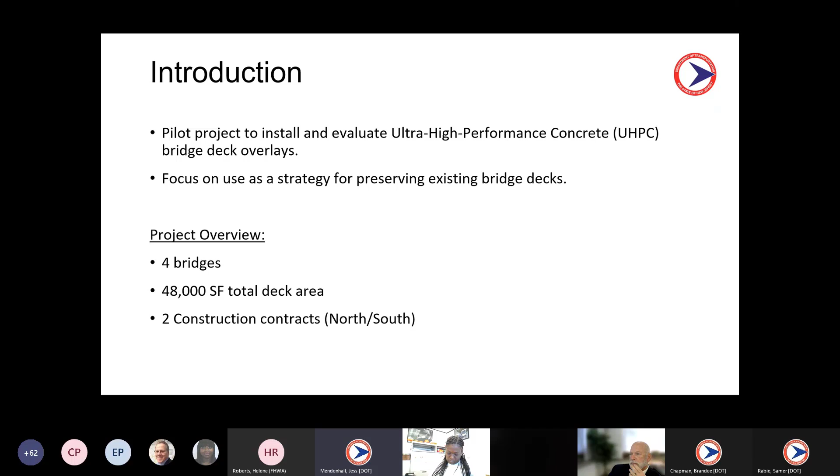Many of you are probably already familiar with UHPC, but if you're not, I'm going to quickly go over some of the material details. UHPC is a cementitious composite material. It's typically composed of Portland cement, supplementary cementitious materials, fine aggregates, water, high-strength steel fibers, and a series of chemical admixtures, a common one being a superplasticizer. Unlike conventional concrete, there's no coarse aggregate, and you can see the image in the upper right showing the mass or weight distribution of the typical components comparing conventional concrete and ultra high performance concrete. There's an optimized dry material size gradation, and this allows for particle packing, giving it a lot of the superior durability properties.

UHPC has mechanical and durability properties that greatly exceed that of conventional concrete. Some of these properties are the compressive strength. There's an increased tensile strength, and there's also a behavior that you don't see in conventional concrete: a post-cracking tensile strength, which comes from the steel fibers distributed in the mix. The durability properties are superior to that of conventional concrete, such as reduced permeability.

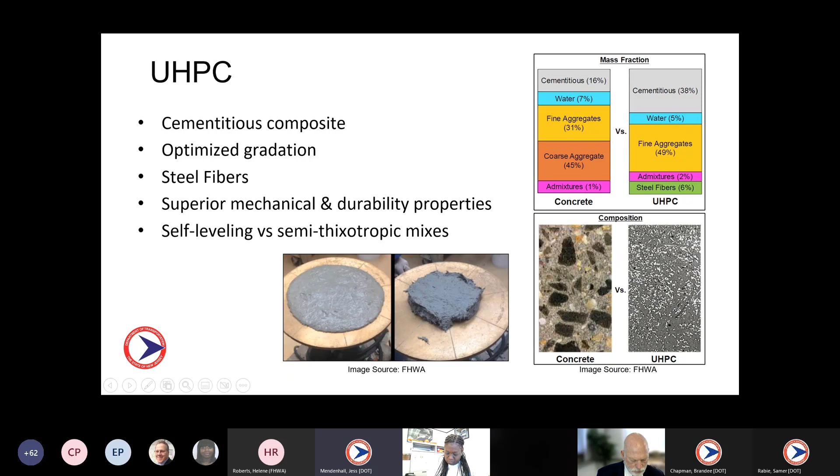UHPC for closure pours is formulated to be flowable and self-consolidating, and this can be poured into the joints with little or no vibration. UHPC formulations for overlays, however, are much stiffer, and they're considered a thixotropic material, and they can hold their shape given the grade and the cross slopes on the bridge deck. You can see the photo at the bottom of the slide showing the self-consolidating mixture on the left and the overlay mixture on the right. Essentially, the overlay mixture under static conditions behaves like a solid, but when you agitate it or induce vibration, it flows and behaves more like a liquid. So there's definitely some differences in the workability of the mix.

Some program background: traditionally, NJDOT has performed reconstruction of primary bridge components after they become structurally deficient, whether that's a deck replacement project, a superstructure replacement, or a total replacement project. If we look at bridge preservation, this allows us to preserve existing bridge components that are in fair or good condition and extend their service life with a more minimal investment.

When it comes to deck slab preservation, we have used various traditional or conventional overlays throughout the years, and we've had some mixed results with this with regard to the construction quality and also the long-term durability. So we've used asphalt overlays with waterproofing, bridge deck waterproof surface course, and also some conventional concrete overlay materials.

The photo on the right is a conventional concrete overlay that's been installed on one of our bridge decks. It has nearly 40 years in service, which is impressive for an overlay. But you'll notice in the photo the overlay is spalling down to the underlying deck, and there's also a deck patch. This particular bridge deck has been patched extensively over its service life, and considering traffic control and having a contractor come out to do this work, there's been extensive long-term maintenance cost. With the UHPC overlay, this is hopefully something that could be avoided. We can reduce the long-term maintenance costs.

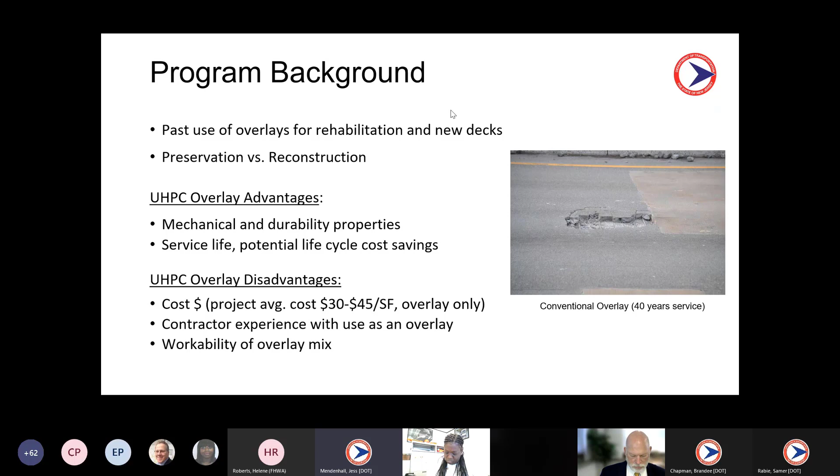Now we want to talk a little bit about comparing deck preservation using a UHPC overlay versus deck reconstruction or deck replacement. Some things you want to consider: one is the existing conditions and the remaining service life of the structural components - that being the deck slab, the superstructure, and the substructure.

If you're using a UHPC overlay, you anticipate a long service life, and you want to ensure that these other components will be able to be maintained for the life of the overlay. Otherwise, you're not using the investment into the UHPC overlay optimally.

You also want to do a remaining service life determination of the structural components, considering their age, doing hands-on inspections, potentially non-destructive testing or evaluation. You can also do concrete core testing of components and get an estimate of the remaining service life from lab testing. You want to consider the initial cost and the life cycle costs, and compare different alternatives, including preservation, rehabilitation, and reconstruction alternatives.

Looking at the typical decision process, you would look to rehabilitate or preserve a deck that is generally in fair or better condition. You would look to replace a deck that is considered to be in poor condition, and it may be extensively contaminated or deteriorated throughout the depth of the deck.

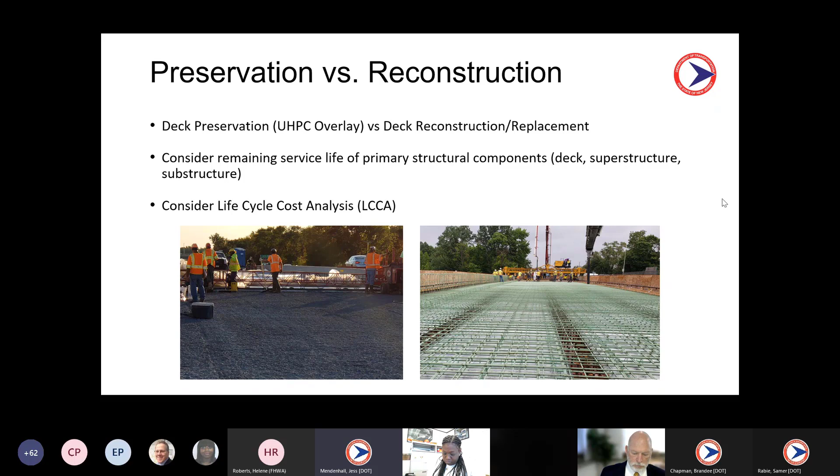So an example of a life cycle cost analysis, a general example. If we look at a bridge constructed in 1990, with approximately 8,000 square feet of deck area, a typical highway bridge, single span multi-girder bridge, some assumptions we could look at: overall, all the structural components are in fair condition. We're going to assume we'll do repairs to the superstructure and the substructure for either alternative to increase the remaining service life.

Assume a 40-year service life of the UHPC overlay. For this cost comparison, we're going to look at structural costs only and consider that we'll do routine maintenance on the bridge. The first alternative would be to do a UHPC overlay now.

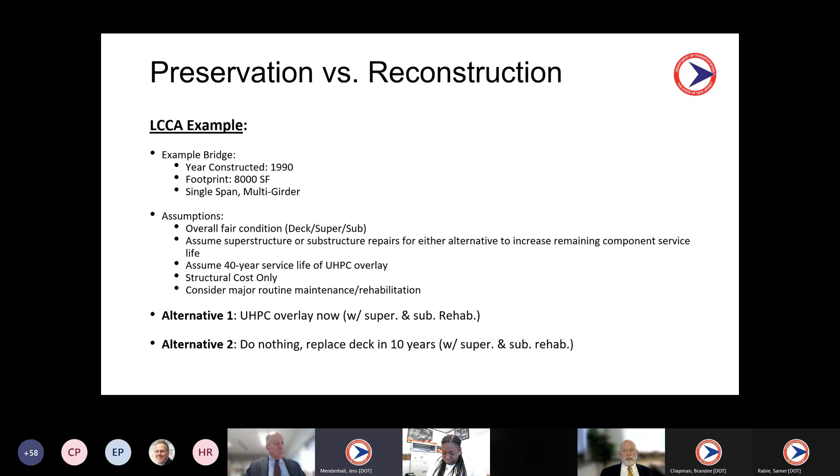The bridge is in fair condition, so we can consider a UHPC overlay and rehab the other components. The second alternative would be to do nothing now and replace the deck in, say, 10 years, when we'll assume the bridge will drop into poor condition. Alternative two is kind of our typical thought process: we move in to do a reconstruction when the bridge becomes structurally deficient. So those are the two alternatives we're going to consider.

We did a cost analysis and life cycle cost analysis for this example bridge. Looking at the initial construction cost, the UHPC overlay for doing the deck work only is approximately $480,000 to $500,000. If we were to do a deck replacement, based on cost of other comparable projects, we'd be looking at approximately $1.1 million for this bridge. That's for the initial construction cost.

Over the life cycle cost, over a 100-year analysis period, for the UHPC overlay alternative, we have a 100-year life cycle cost of $7.2 million. For the deck replacement alternative, a life cycle cost of $7.7 million. So for initial construction costs, it's a relatively significant cost difference favoring the UHPC overlay.

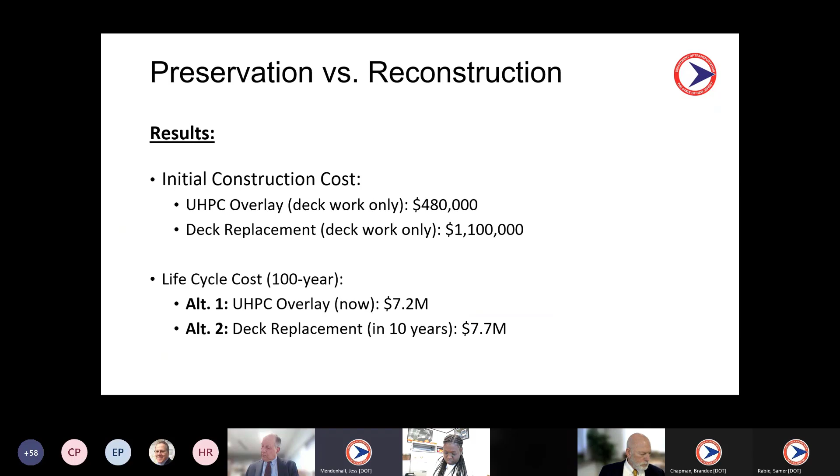The 100-year life cycle cost clearly favors the UHPC overlay, and we used some conservative assumptions. Life cycle cost is heavily based on the assumptions you make, so potentially there could be increased or decreased savings depending on those assumptions. I don't want to focus too much on the exact numbers, but we're trying to emphasize doing an analysis of initial construction costs and also a life cycle cost analysis to compare preservation versus reconstruction projects.

Back to some of the details of our research project, I'm going to talk a little bit about the bridge selection process we used during project development. These are 4 photos of the bridges that were ultimately included in the project.

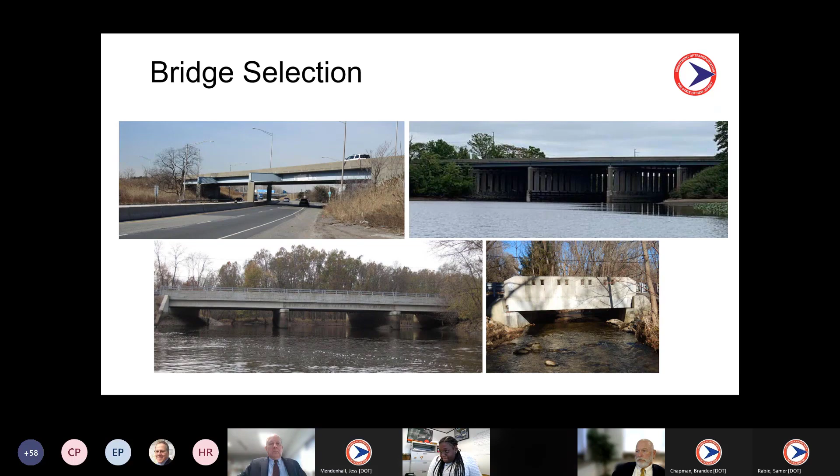During project development, we screened dozens of bridges. Eight structures were shortlisted and fully evaluated and tested, and I'll talk a little more about that evaluation on a following slide. Four structures were advanced into design and construction.

Some considerations for the candidate bridges: looking at the condition ratings of the primary structural components, we were looking for bridges in fair or good condition. Repeating some of what I mentioned before, we wanted to ensure there was adequate remaining service life of the structure. We were looking for decks without signs of extensive deterioration, no underdeck spalling or chloride contamination. For this research project, we wanted to keep the scope of the work to the overlay and avoid having to do extensive repairs to the other components.

The focus of the project was on the UHPC overlay. All bridges that were ultimately selected had an existing asphalt overlay, and we wanted to avoid decks that had an extensive depth of this overlay.

Another consideration, given the high anticipated service life of UHPC, is to ensure the bridge will be functionally adequate for the long term. Looking at things such as load ratings, the approach and the safety features, and the roadway widths and clearances—you want to make sure those will be acceptable long term, so you don't have to come back after installing a UHPC overlay and do a widening or reconstruction, to get the most for the investment.

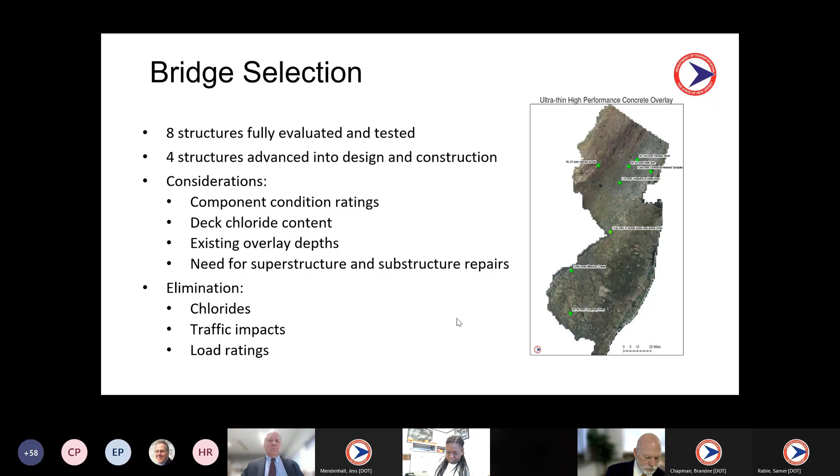This is a table of the 4 bridges included in the contract. Some things to note: we had 2 bridges with decks that were relatively new, approximately 10 years in age, and 2 bridges with deck slabs approximately 30 to 40 years in age and towards the end of anticipated service life. We had a range in the deck slab areas. Again, all bridges had existing asphalt overlay, and the condition ratings of all primary components were good or better.

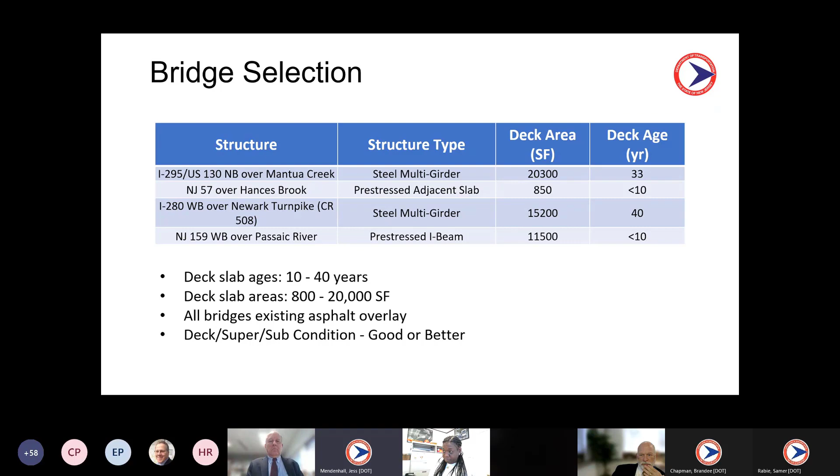To talk a little bit about the evaluation we did on the 8 candidate bridges, we took concrete cores on the bridge decks. We did 3 cores on each bridge deck to get an accurate estimate of the existing overlay thickness, and also to take chloride profiles at various levels through the deck via chloride lab testing.

We also used GPR, ground penetrating radar, to ascertain the overall condition of the deck and get an idea if there were any variations in the overlay thicknesses, and also to estimate, after doing the hydrodemolition, if there would be any areas requiring full depth spall repairs.

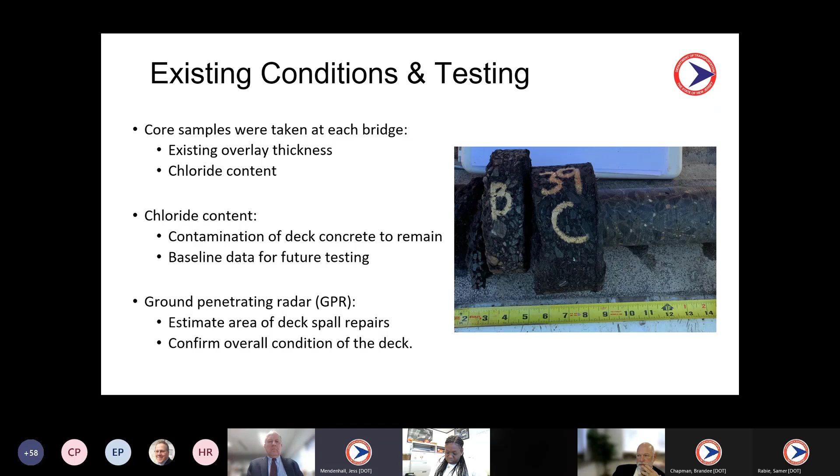I'm going to go over some key aspects of the design. For this project we had some environmental constraints. It was a limited scope project, and one constraint was to match the existing and proposed elevations. As I mentioned, all of these bridges were asphalt overlaid, so we had to consider options to maintain the final top of deck grade while avoiding excessive thicknesses of the UHPC overlay.

For this project we used a thin bonded UHPC overlay. Based on FHWA research, UHPC overlays can be a minimum of 1 inch, but for this project we used an average of about 1.5 inches to account for construction tolerances. Structures with an existing asphalt overlay greater than 3 inches were designed with a 1.5 inch UHPC overlay plus an asphalt topping, again to minimize UHPC quantities while maintaining grades. One bridge, NJ159, was designed with a 2.75 inch UHPC overlay with no asphalt topping.

Asphalt topping on top of UHPC overlays is common practice in Europe. Another key aspect of this project: we did not rely on the strength provided by UHPC. It was solely for durability properties, but that's something we'll consider for future projects.

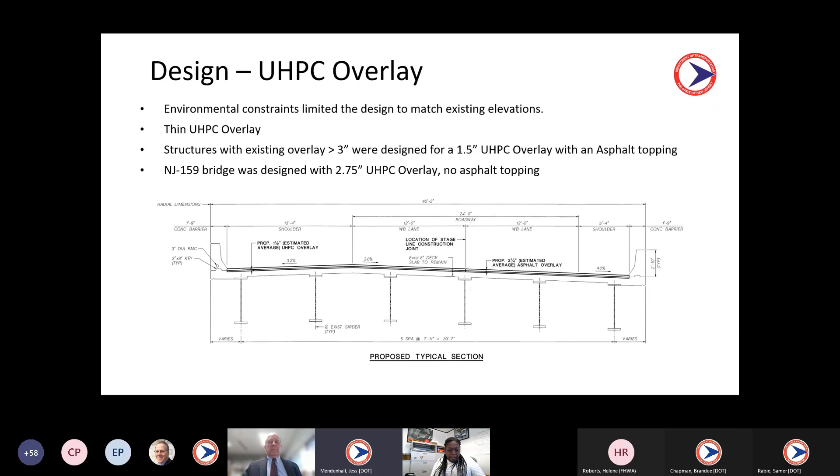After the existing overlays were removed from the bridges, we specified hydrodemolition to remove the upper half inch of the existing deck surface. Based on FHWA research and reporting, hydrodemolition is the preferred choice for surface preparation to bond the deck with the UHPC overlay. It creates an ideal bonding surface that's very rough, with no microfractures that could otherwise affect bond performance.

Other technologies such as diamond grinding or milling can be used, but they induce microfractures that can affect the long-term performance and bond of the overlay. So for this project and future projects, we're going to specify hydrodemolition. You can see the photo here of a typical concrete surface after hydrodemolition - it's a very rough surface with exposed aggregates, and it also removes deteriorated areas of the deck slab.

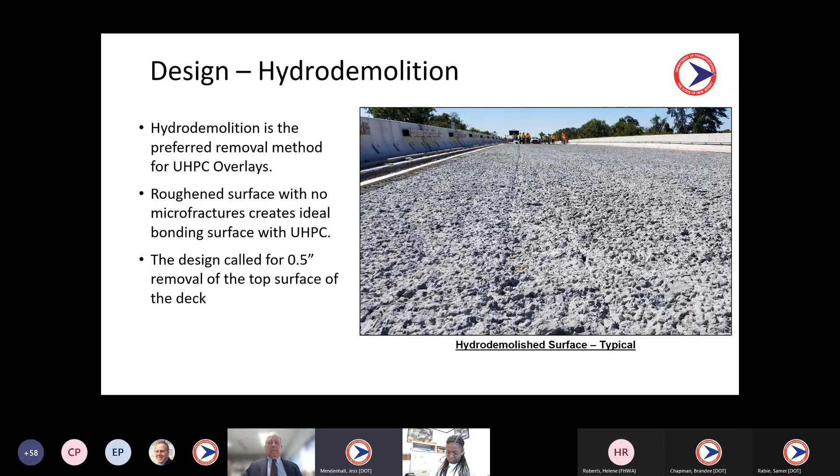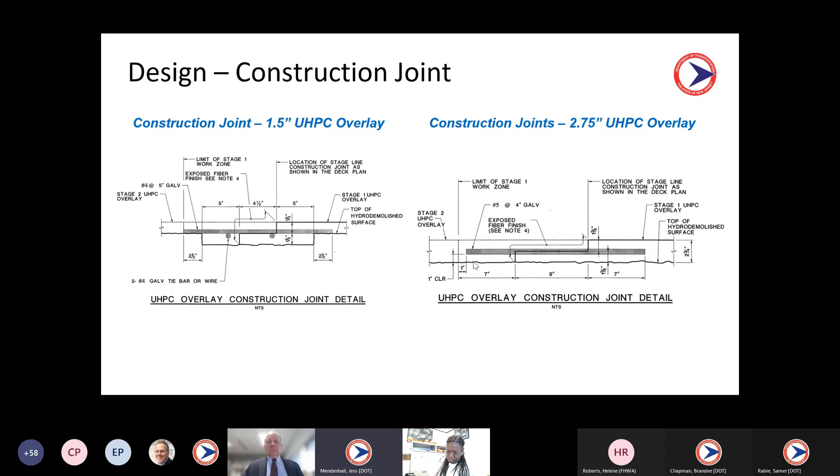An exposed fiber finish was specified between stage 1 and stage 2 overlay to promote bonding. Previous research has shown that a poor bond occurs between the hardened UHPC in stage 1 and the fresh UHPC in stage 2 unless an exposed fiber finish is provided. Samer will show a photo of this construction section in a following slide.

For the deck joints, some of the deck joints on the project - essentially the end of the deck slab and the abutment header - were removed full depth and reconstructed with UHPC. From our past experience, this location of the bridge is particularly susceptible to deterioration and spalling, so we wanted to reinforce the area with UHPC.

Samer will discuss some of the lessons learned on this particular detail later in the presentation. So that's it for my part. Now I'm going to pass it off to Samer, and he's going to finish the presentation. Thank you.

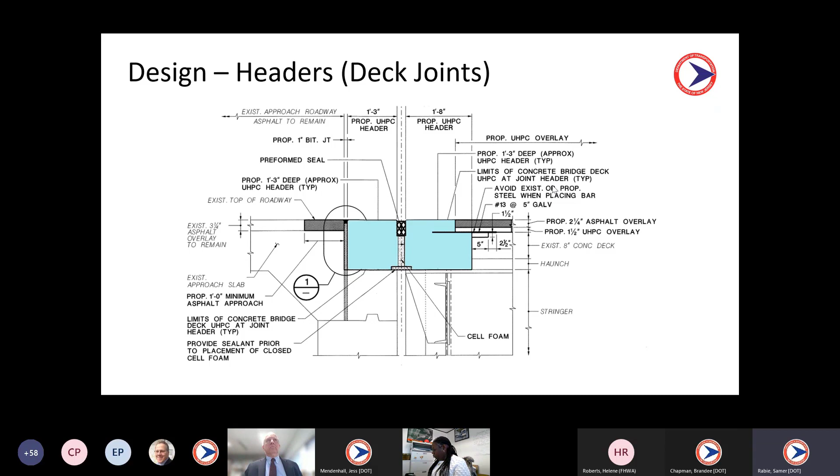For the remainder of the slides, we'll cover the special provisions, the construction, the lessons learned, and the evaluation program. Starting with material testing, the UHPC mixes consisted of a partial premix made by the supplier, including sand, water, liquid admixtures, and steel fibers at 3.25% of the total dry volume.

The results of the acceptance test shown on the slide were provided in a submittal package. Due to the global pandemic at the time of testing and verification, there were no feasible labs for this project at the time of construction to provide some of the certified tests from FHWA publications. Meeting the acceptance criteria while having this challenge led to the acceptance of alternative test methods pursued by the supplier, including the bond strength by pull-off and direct tension tests.

To ensure the consistency of each batch, a procedure of flow testing in accordance with ASTM C1437 was followed. For fresh properties, the dynamic flow test is measured by dropping the flow table 20 times continuously over a period of 10 seconds, and the average is recorded. With 3.25% steel fibers, the values of the static and dynamic flows were 4 to 6 inches and 6 to 8 inches, respectively.

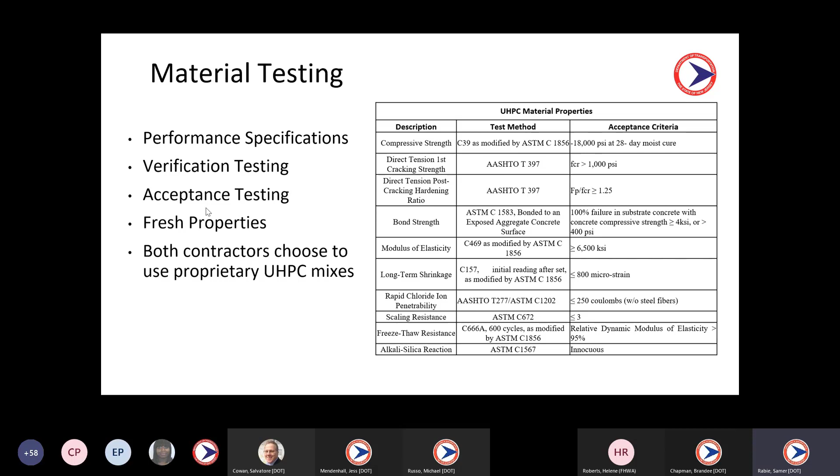Overlay material is often challenging to control for contractors, regardless of what the material is used. Per the contract document, contractors were required to successfully place a 4-foot by 12-foot by 3-inch deep rectangular test slab of UHPC with a grade of 8% in the longitudinal direction. While this may not be appropriate or necessary for all sites, it should be considered to account for specific project needs, such as the profile grade, cross slopes, and complex geometric conditions related to large skew angles.

In the images here, supplier X on the left failed to pass the mock-up test. Subsequently, the contractor invited supplier Y. The actual placement of the UHPC overlay does require a high level of skill, and the placement and finishing skills should be confirmed, attained, or fine-tuned during the mock-up test.

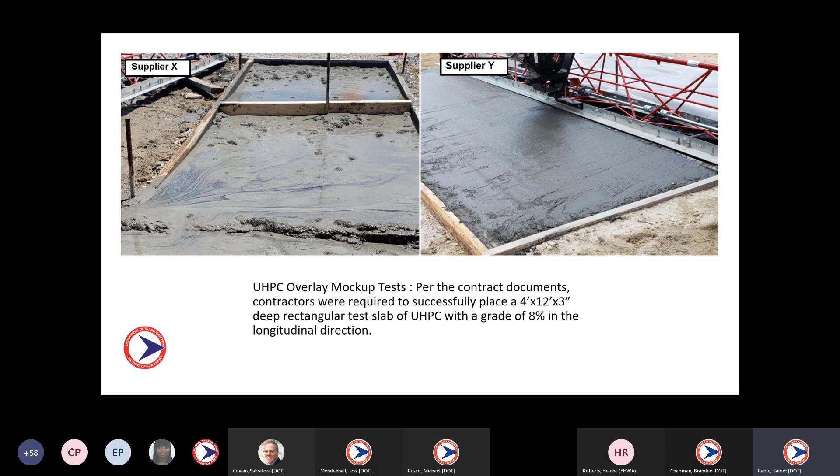Hydromilling was used to remove half an inch of the top of the existing concrete decks, as well as the full depth removal of the existing headers. This provides a rough profile for the UHPC to bond to, removes surfaces exposed to vehicles and asphalt oils, and also protects reinforcement in the deck in the event it is encountered shallower than anticipated. Hydrodemolition spoils and water are required to be hauled off-site to a treatment facility unless permits are obtained for a project for alternative disposal methods.

Disposal to public sewage or drainage facilities is strictly forbidden. Specifications should clarify that the cost for any disposal of demolition material must be included in the bid price of the demolition pay item.

A specialized contractor brings in prior experience placing UHPC, has established relationships with the UHPC suppliers, and has specialized equipment. A specialized UHPC placement contractor was used as a subcontractor to the general contractor, part of Contract A in Region North, but not for Contract B in Region South. More contractors are expected to join this industry, allowing more competition and competitive bid pricing.

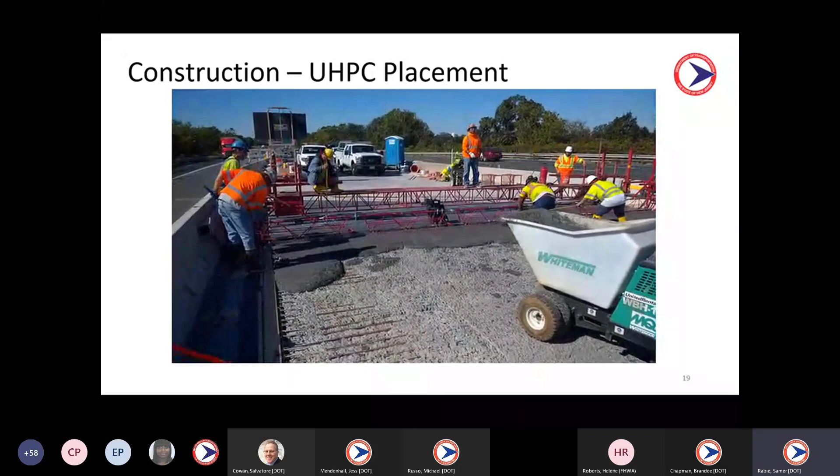To the extent that a specialized UHPC paver is desired or needed, the specialized UHPC pavers are available for purchase by any contractor. This may be the case for overlay thicknesses greater than 2 inches. As long as the documents require the appropriate measures be taken by the contractor, along with the quality control requirements, the desired end product should be attainable by a general contractor or a specialized subcontractor.

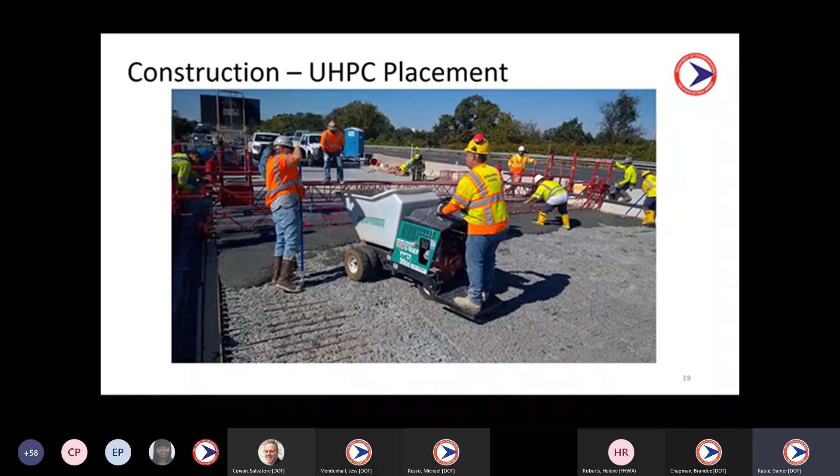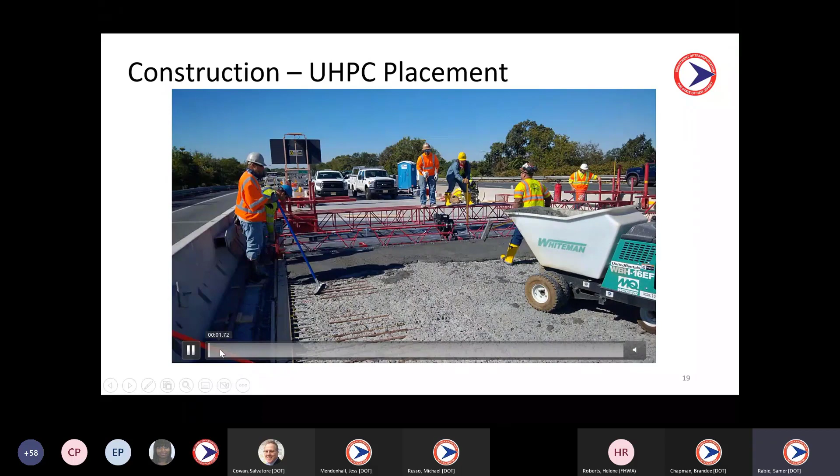One thing we'd like to point out about this video is how the operation is maintained and continuing while there's traffic on the adjacent lanes, and how it helps with the staging without major impact to the flow. This is the 295 bridge.

The contractor should provide how the screed will be set up, and achieve the required UHPC thicknesses to avoid potential thicker areas.

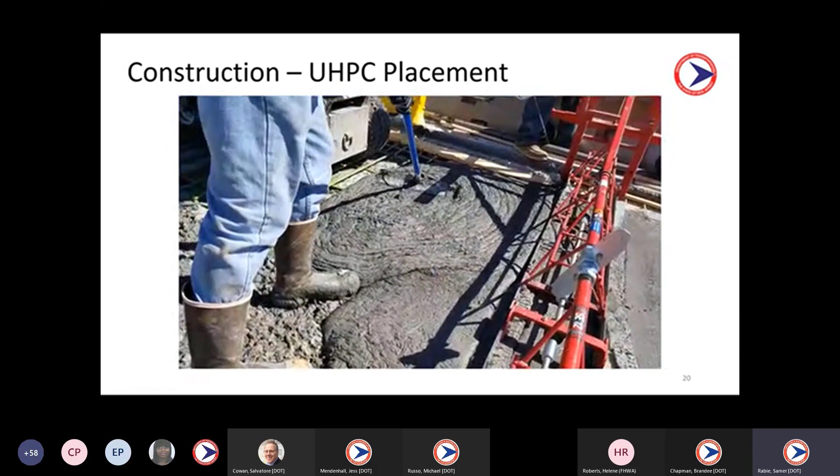While the designer shouldn't dictate the means and methods, it may be prudent to include an advisory note that high shear capacity mixers may be needed and should be considered while developing installation procedures. However, it is ultimately the contractor's means and methods to achieve the desired final results. The most crucial element is the mixing and establishing the correct amount of UHPC fluidity to ensure the UHPC holds the grade of the deck.

This, however, will always be under the control of the UHPC supplier's experienced technicians, regardless of the presence of a specialty contractor.

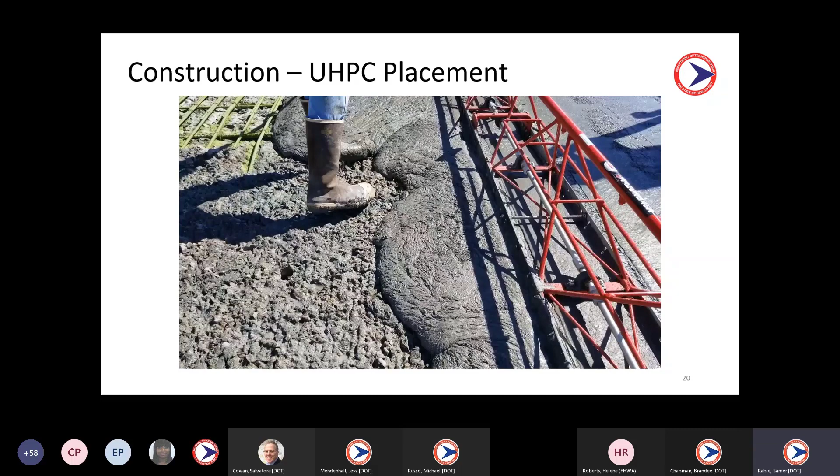Exposed fiber finish at the construction joints should be emphasized in the contract drawings by requiring the exposed fiber finish work procedures be included in the work plan and submitted before UHPC work starts. This includes the timing for fiber exposure work, since in one instance this activity was delayed too long and the UHPC had already gained most of its strength.

An image of the desired surface should be included in the special provisions or plans to help reduce confusion. The contractor's work plan should also include a procedure for installing key joint formwork early in the preparation of the construction joints and the stage line construction.

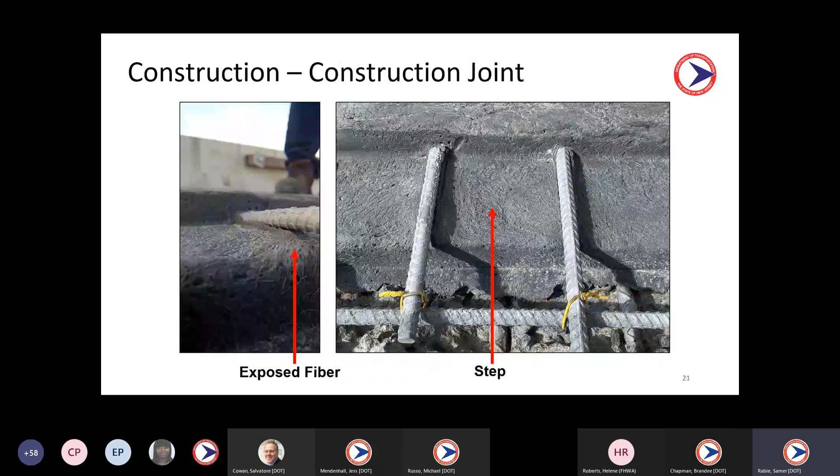Special provisions also require that all formwork in the UHPC must be non-absorbent, which can be achieved by using resin-coated products or wrapping formwork in plastic sheeting.

With the mock-up tests and shop drawings, the contractor should be required to identify the system and demonstrate how the sheeting will be secured if required. The consequences of an insecure system will not only compromise the final product, but could also result in safety concerns to traffic on the adjacent lane.

It is crucial to ensure proper curing in accordance with the specs and approved working drawing procedures to prevent dehydration cracks.

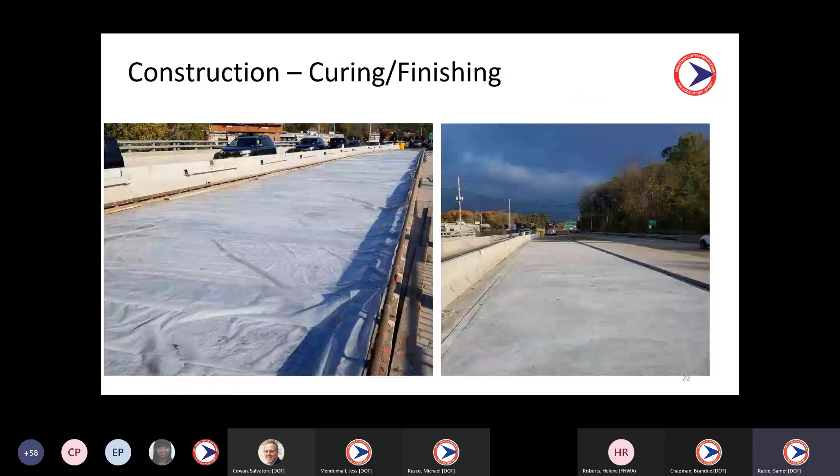Moving on to some lessons learned, starting with scoping and concept development for future projects, we will identify locations where UHPC will serve as the final riding surface. This will allow for evaluation, inspection, and assigning more representative condition ratings in the future.

If, however, an overlay on top of the UHPC must be provided for any reason, such as geometry or profile, we will consider the bridge deck waterproofing surface course, which is a performance spec, non-proprietary, and does not require a waterproofing membrane. Another alternative could be high-performance thin overlay materials.

For existing conditions, GPR can help determine concrete cover, overlay thicknesses, and reinforcement locations, as well as locate emerging spalls or delamination. This will help attain more accurate bids based on the deck repair limits.

Two other items we are improving in our special provisions: additional language that during construction there should be emphasis on surveys for each interim stage to determine the actual depths of hydrodemolition and the material quantities required for placement, to ensure a continuous operation.

The other item would be emphasis on specifying watertight forms, top forms, and a minimum of 1/4 to 1/2 inch overfill to help reduce the amount of surface deficiencies. The contractor is responsible for determining the appropriate overfill thickness. This could result in higher bids, but additional material quantities are not expected to result in substantial cost impacts.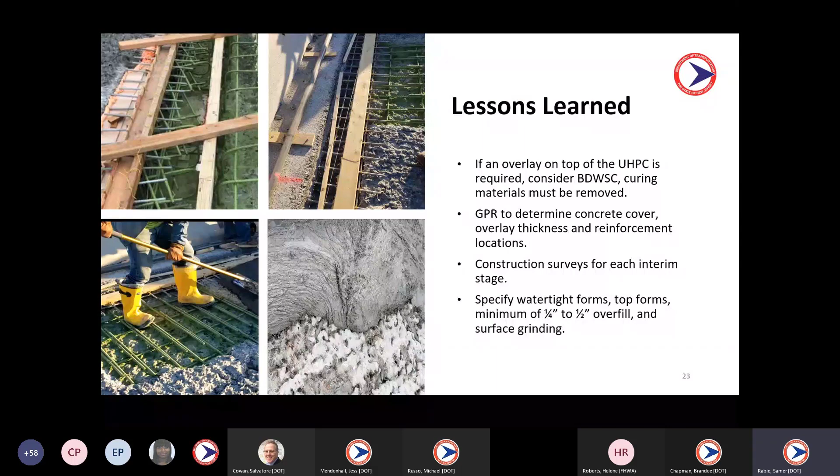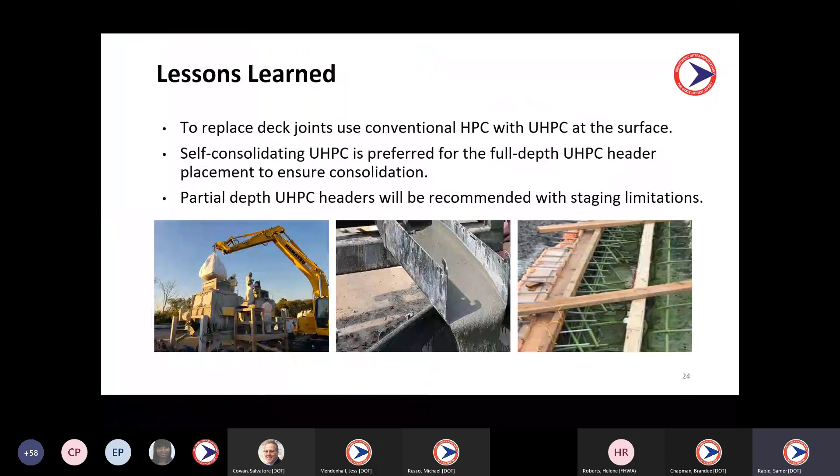After observing the difficulties of header demolition and construction, we have two alternatives moving forward. One is using flowable self-leveling UHPC for the full depth of the header placement to ensure proper consolidation around tight corners and reinforcement. The other is a hybrid system of partial depth high-performance concrete headers with UHPC over the top surface to provide the same overlay thickness over the entire structure. This will help mitigate some constraints in staging and schedule allowance.

The UHPC slurry with no fibers was placed in the identified air voids. Since the voids contained overlapping exposed fibers, it was considered to create adequate bonding with the UHPC slurry.

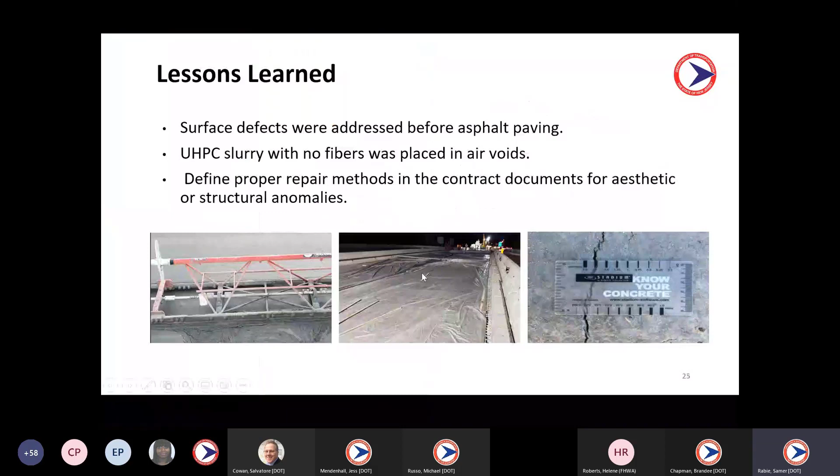So for the evaluation program to assess the performance of the UHPC overlay, we put together a testing program including non-destructive testing as well as physical sampling and lab testing.

This objective will be accomplished by first establishing baseline conditions through an initial survey, followed by periodic monitoring of the UHPC overlaid bridges over succeeding years. This will give us some understanding of the deterioration rates, which will be beneficial in determining the life cycle cost analysis, as just discussed, during decision-making and alternative selection.

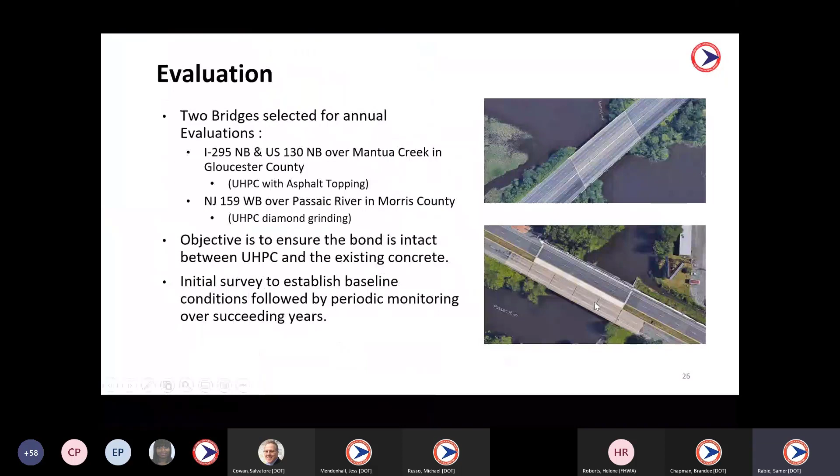The 2 bridges that were selected were the 295 bridge with the asphalt overlay on top of the UHPC, and the 159 bridge westbound, which had the UHPC exposed surface.

For the non-destructive testing, we first looked at GPR. However, the GPR signal was scattered significantly, and the 3D rendering was ineffective due to the presence of steel fibers in a random configuration in the concrete. So we moved to impact echo and ultrasonic shear wave tomography.

For physical sampling, we used pull-off testing to give us the bond strength, and more importantly, the failure modes. We also did chloride content testing to understand the permeability.

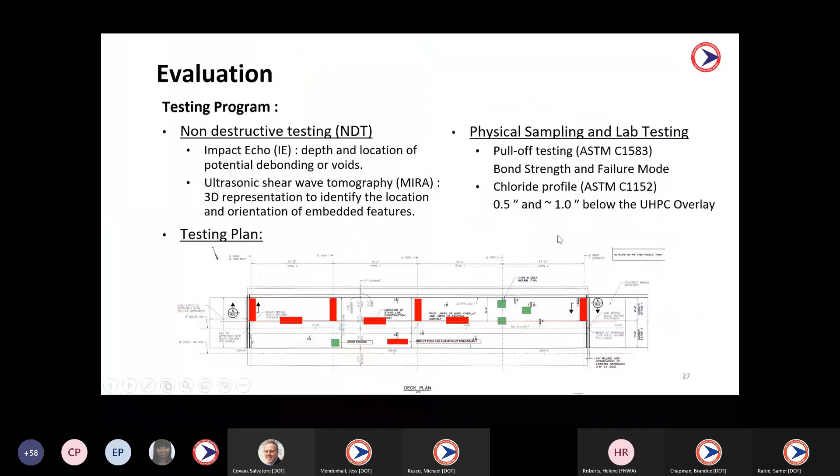During an impact echo test, the surface of the concrete is impacted to generate stress waves. The response signals, when analyzed, include a range of frequencies corresponding to the element thicknesses, reinforcement, delamination, and geometric boundaries. The impact echo testing was applied on a point-wise basis over a 2-foot by 2-foot grid at various locations along the bridge.

With this line being clear at this area at 6 kilohertz, this gives us an indication that the bond between the asphalt overlay and the UHPC is intact, as well as the bond between the UHPC overlay and the substrate or existing concrete. At 2 locations, we were not able to get that dominant frequency, giving us an indication that there might be delamination or debonding at these areas. These areas were identified and were included in the succeeding year testing program.

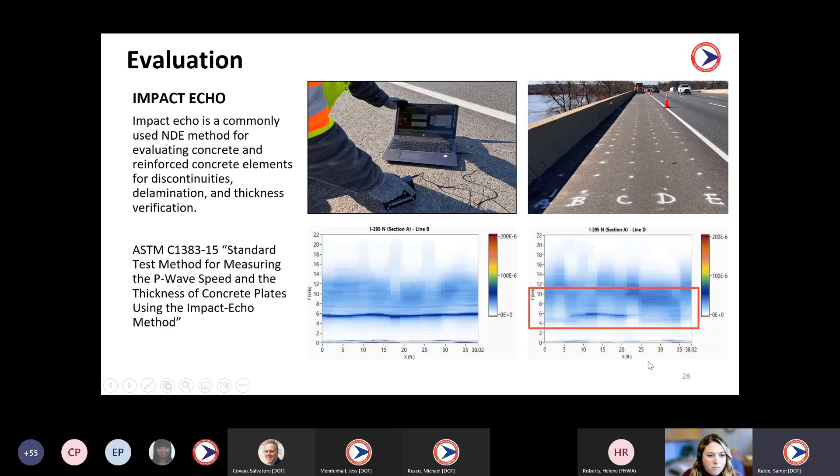Shear wave tomography involves the propagation of shear stress waves, or S waves, through the concrete, transmitted and received by an array of transducers. Analysis of the signal times and angles allows for the construction of a 3D representation of embedded features. The transducers are spring-loaded, allowing for the testing of uneven surfaces, unlike the impact echo.

So for the 159 bridge with the exposed deck, we were not able to perform the impact echo test because the width of the grooves on the deck corresponded to the dimensions of the impactor. That's why we moved to the ultrasonic shear wave tomography.

This data was collected on a grid as well at 6 inches by 4 inches to construct the 3D representation, and the test sections were used to complement the impact echo findings for the 295 bridge. The data is collected at a series of shots, step by step, on a grid.

The asphalt concrete bond appears to be sound, therefore the reinforcing bars are clear, as we can see here. There were no further discontinuities observed below this depth, indicating an intact bond between the original concrete deck and the new UHPC overlay.

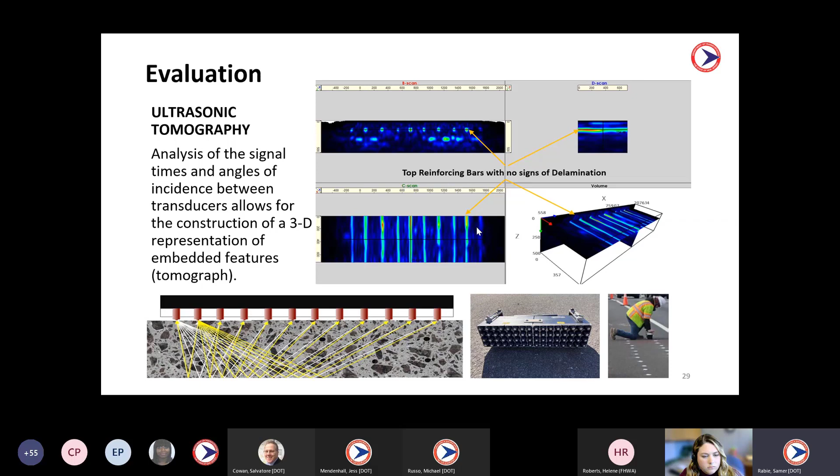The non-structural bond between the asphalt layer and the concrete was weak at a few locations, blocking the majority of the signals, as we can see over here, where this reinforcement is masked as compared to the one next to it. And these areas were also marked and identified for the succeeding program.

At the beginning, most of the failures were failure mode D for us until we nailed down the epoxy that we need to use, as well as the curing times, after which we got the desired results of failure mode A, except for a few locations where we got failure mode C, and those areas were also identified.

For the chloride contents, the segments were taken at 2 depths, at 1/2 inch, which is within the UHPC overlay, and 1 inch, which is below the UHPC overlay. Generally, the chloride contents were considerably lower than the 2 pounds per cubic yard threshold to initiate corrosion per our NJDOT bridge design manual, except for core C2.

Core C2 had very high concentrations of chloride. Potential cause for C2's unexpected high chloride content may be due to the area from which it was extracted. Properties such as the location, geometry, condition, to name a few, may have led to the pooling of water or salt water within the area of core C2.

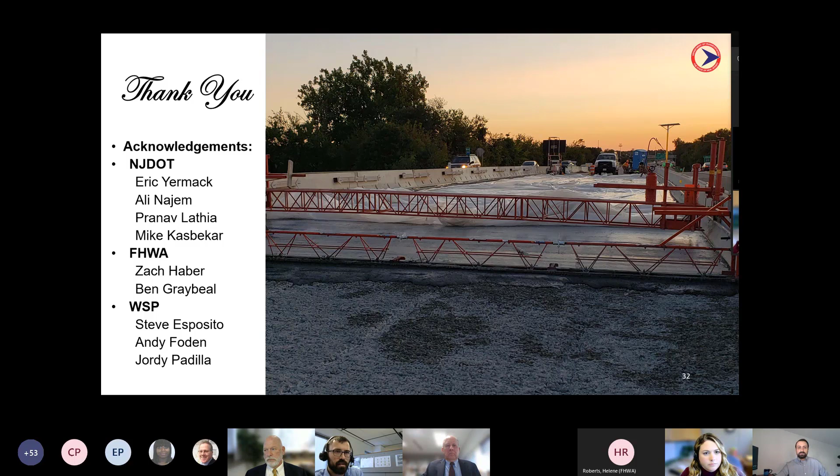One of the questions here from Ali: what is the approximate service life of the UHPC overlay? We considered about a 40-year service life for the life cycle cost analysis. It's highly dependent on whether you're using it for preservation, and ensuring that the UHPC overlay prevents further chloride ingress or moisture ingress. Even if you already have chloride contamination or corrosion issues, we anticipate those would cease. But if you have a deck slab that doesn't have those issues, the overlay is going to cut off those contaminants. Realistically, we think we could get more than 40 years out of it, but other components of the bridge are going to deteriorate and require replacement, or the bridge will become functionally obsolete, and we think that's ultimately what's going to limit the service life. These materials and testing, FHWA has tested some UHPC samples since the 90s, essentially ponded in chloride baths, and there's been essentially no deterioration detected. It's really an impermeable material. But for our analysis, we considered about 40 years.

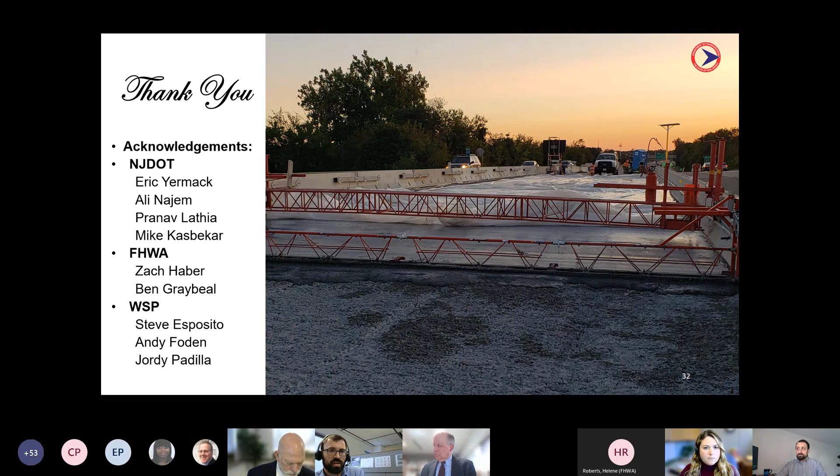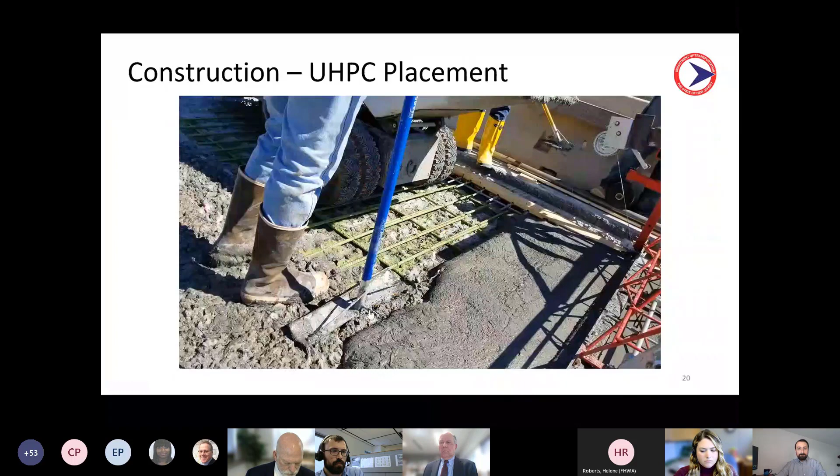And the second part of that question, what is the surface preparation? Hydrodemolition is what's recommended. It provides a superior bonding surface, and a big thing is when you're demoing a deck, it removes all unsound concrete. You don't want any unsound concrete interfacing with the overlay material, and you want adequate bond. So hydrodemolition is what we used, and that's what's recommended for future projects.